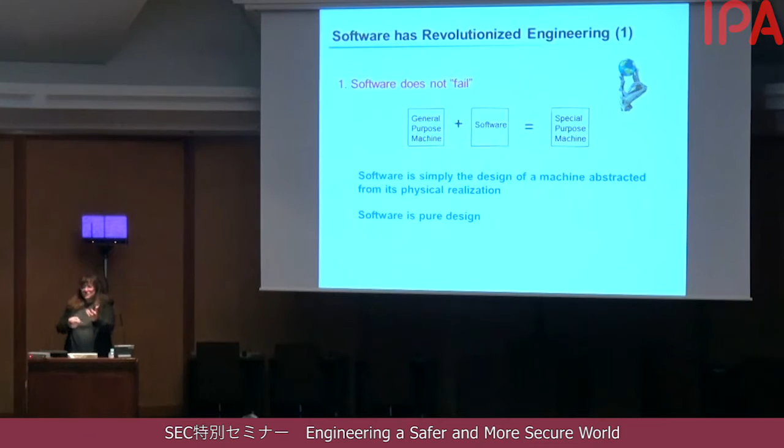Software is simply the design of a machine abstracted from its physical realization. Its essence is pure design. We've never had that before. But what does it mean for pure design, an abstraction, to fail? It's just design. It has no physical presence.

The second problem is that the role of software in accidents almost always involves flawed requirements, either incomplete or wrong assumptions about the operation of the controlled system or the required operation of the computer, or unhandled controlled system states and environment. For example, the autopilot expert provides some requirements to the software engineer, and the software engineer then designs the autopilot. The problem is we spend most of our effort here on making sure that the implementation is correct.

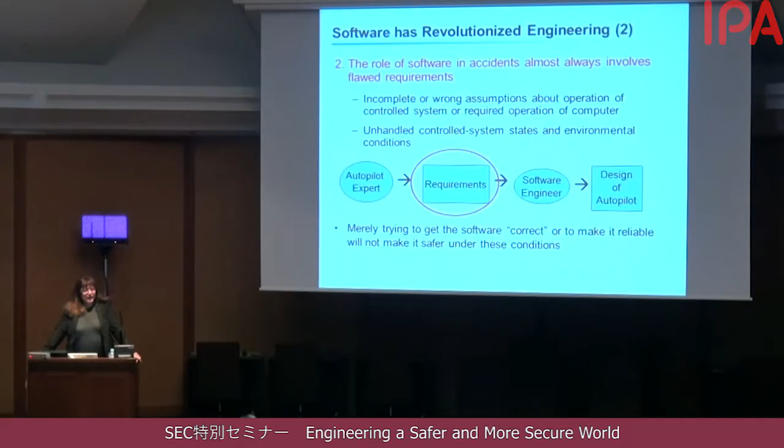But almost all accidents, I've been doing this for 35 years, and I've seen hundreds of them, every accident has involved flaws in the requirements, not in the implementation. So merely trying to get the software correct or to make it reliable is not going to make it safer if the requirements are wrong or are unsafe.

The third problem is that software allows almost unlimited system complexity. We can no longer plan, understand, anticipate, and guard against all undesired system behavior. We used to be able to test our systems, often exhaustively, and get the design errors out. And so all we had left were component failures, random failure, when we were using the systems. But this is no longer true. Our systems are so complex that we cannot test to find all the errors.

So we now have two types of accidents. The first type is the old traditional component failure accident, where there are single or multiple component failures, and we usually here assume some kind of randomness in the failures. But we now also have increasingly seen component interaction accidents that arise in the interactions among the components. None of the components may have failed. It's really a system design problem. They're related to interactive and dynamic complexity in the systems that we're building.

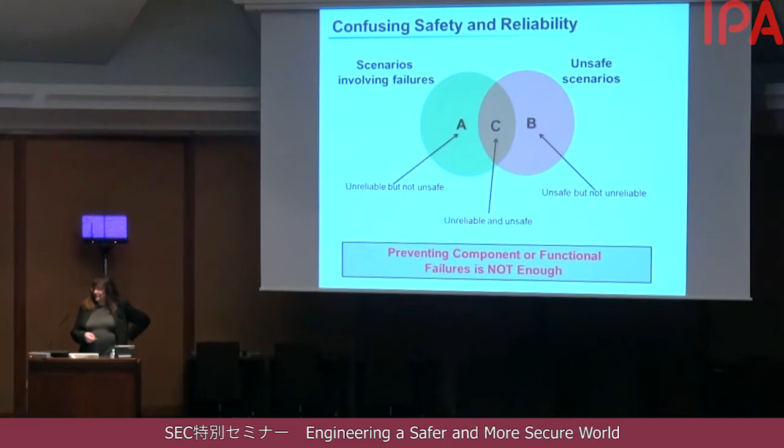So there's often a confusion between safety and reliability. So in the green circle are unreliable but not unsafe scenarios. Those are all the failures that can occur, failure scenarios. And this circle are the kinds of things that FMEA, failure modes and effects analysis, identifies. The pink circle is all the unsafe scenarios. Now, in the overlap, they're unreliable and unsafe. That's what fault tree analysis finds. But this part over here that are unsafe but not unreliable can't be found by our techniques, which are basically reliability techniques, techniques that are looking for failures.

The final really big change with software is that the role of humans in systems has changed. There's usually always been an assumption that operator error is the cause of most accidents and incidents. So as soon as the plane crashes, before they've even gone and found the plane, it's always announced that it was pilot error. Or most of our accidents in automobiles are assumed to be driver error or driver fault. So if that's true, then we have to do something about the operator. We could admonish them, fire them, retrain them, but we have to do something about them.

Or we can do something about operators in general. We can marginalize them by putting in more automation. So we put more automation between the driver or the operator and the actual physical system they're controlling. Or we rigidify their work by creating more rules and procedures that they probably won't be able to follow.

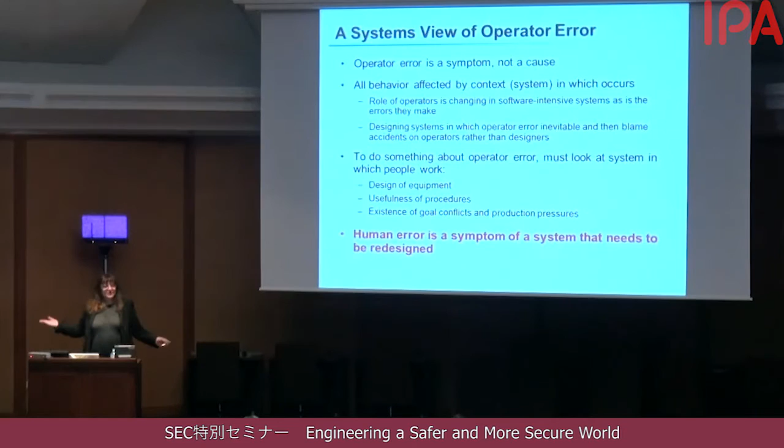We have to understand why people who are well trained, usually, trying to do the right thing, do the wrong thing. It's not just a random thing. It's usually something about the design of the system.

And in fact, today, we too often have human factors people concentrate from the interface screen outward. So they look at the screen design, the training of the operator, the procedures, and engineering concentrates only on the screen in. The problem is that there's not enough attention on the integrated system as a whole.

So we're designing automation that's confusing the operators. Mode confusion is very typical today. The operators are confused about what mode the aircraft or the automobile is in. Or situation awareness. They're confused about what's happening in the system. So we need to figure out how to do better integrated design. In engineering now, this is usually called human system integration.

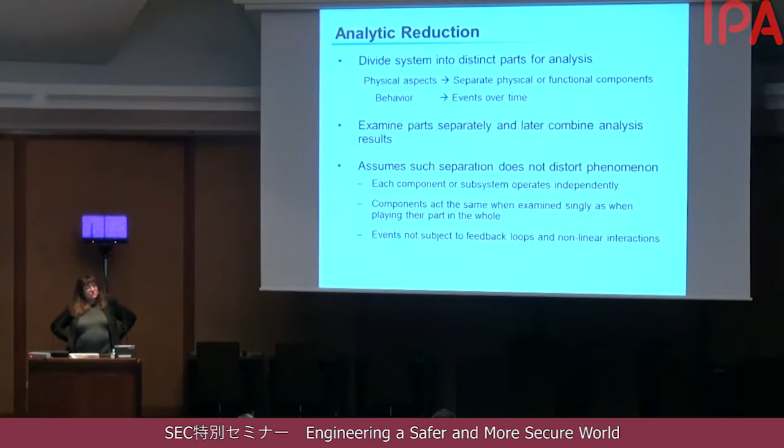It assumes that that separation doesn't distort the phenomenon itself, that each component or subsystem operates independently, that the components act the same when we examine them singly as when they are playing their part in the whole, and that the events aren't subject to feedback loops and nonlinear interactions. And for many systems, those are reasonable assumptions. And so we based our traditional approach to safety on this reductionist idea.

Divide the system into components, assume that accidents are caused by component failure, identify chains of directly related physical or logical, that is, functional, component failures that can lead to a loss. And that's what we're doing in fault trees, right? You're putting it together in a tree, but it's really a chain of events that you're identifying, failure events. And then we evaluate the reliability of the components separately, and later combine the analysis results into a system

reliability value. The problem is that this assumption of randomness in the failure events is required to derive the probabilities for a loss. But software and humans don't satisfy that assumption. Software and humans don't behave or fail randomly. In fact, they don't necessarily fail.

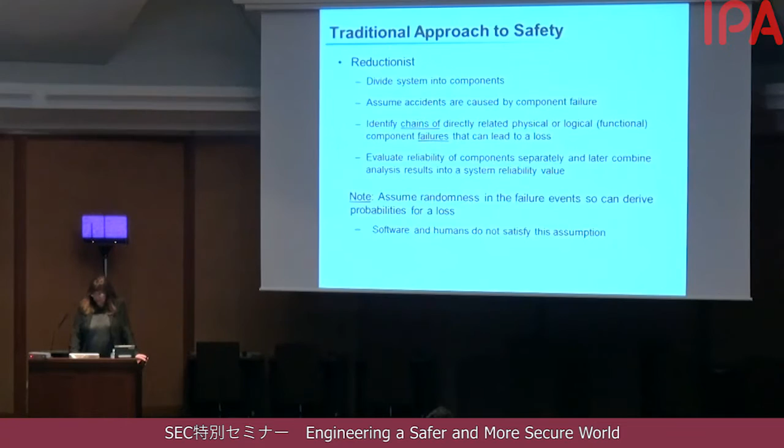But this idea of accidents as chains of failure events forms the basis for most safety engineering and reliability engineering analysis: fault tree analysis, probabilistic risk assessment, failure modes and effects analysis, event trees, fault hazard analysis, and so on. And it also forms the basis for our design techniques. We concentrate on dealing with component failure, because if component failure is the cause of all accidents, then we need to design to protect against component failure.

We use redundancy, barriers to prevent failure propagation, high component integrity, over-design, built-in safety margins, fail-safe design, and for humans, we identify operational procedures, checklists, provide training, and so on. The problem is, it doesn't work for a lot of things.

It doesn't handle these component interaction accidents where there were no failures. It doesn't handle system design errors. It doesn't handle systemic factors that affect all the components and the barriers. It doesn't handle software and system requirements errors. It doesn't handle human behavior in anything but a very superficial way. It doesn't handle indirect and nonlinear interactions and complexity. And it doesn't handle the migration of states toward higher risk over time.

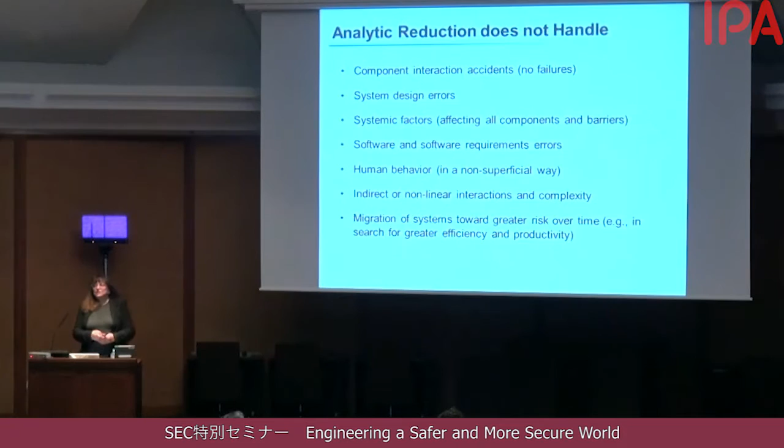In the search for greater efficiency and productivity, we start to change our behavior, and we usually move towards states of higher risk. You don't have an accident, so you think, oh, well, we can make it more efficient. And you keep doing that until you eventually have an accident.

So the alternative to this is systems theory. I want to spend a few minutes defining systems theory, because although it's very old, it's not taught very often in universities. It was developed in the 1940s and 1950s for systems that were too complex for complete analysis, that when you separated them into subsystems, it distorted the results.

And the most important properties in these systems are emergent, and I'll explain what that means, but basically they emerge from the interactions between the components. At the same time, these systems were too organized for statistics. There's too much underlying structure that distorts the statistics, and in fact, new technology and designs have no historical information. If you've written the software and it's the first time it's being used, which is usually the case, how do you know what the probability of failure is, if we even can define software failure? We have no information until 10 years from now, and then it's too late.

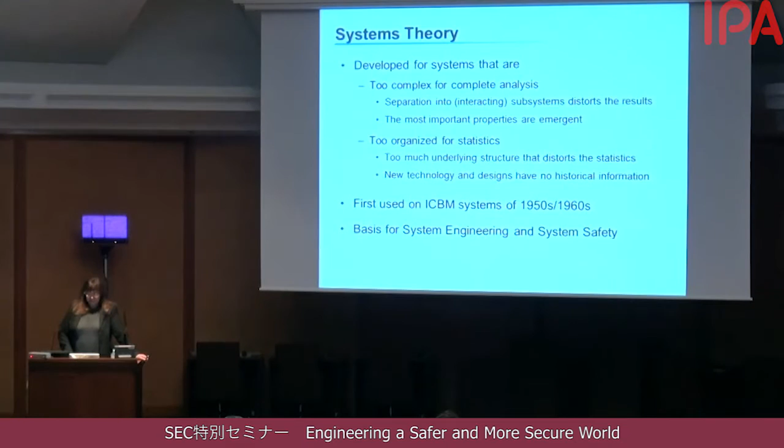In fact, systems theory was first used in the 1950s and 1960s for the intercontinental ballistic missile systems that the United States was building. We started having accidents, and these systems were so complex, they started having these component interaction accidents. They started having accidents where no individual components failed, but they were caused by system design errors. And in fact, systems theory became the basis for system engineering. System engineering was also invented for these same ICBM systems, and system safety at the same time.

So what is systems theory? Well, it focuses on systems taken as a whole, not on the parts taken separately. It looks at the things that I mentioned before, emergent properties. These are properties that can only be treated adequately in their entirety, taking account of all social and technical aspects. You've probably heard the phrase, the whole is greater than the sum of the parts. That's the basic principle behind systems theory and behind system engineering. These emergent properties arise from the relationships among the parts of the system, how they interact and fit together.

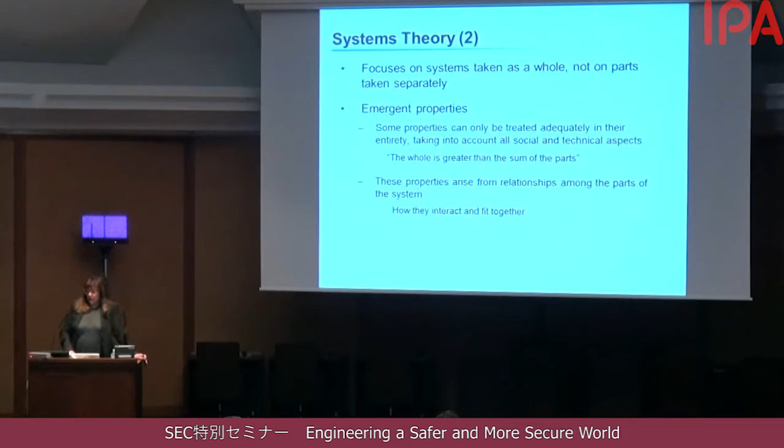Safety and security are emergent properties. If I hold up a valve and I tell you, I'm going to use this valve in my car or in my nuclear power plant, will the car or the nuclear power plant be safe? You can't answer that question because safety is not in an individual component. It's in how all the components interact together.

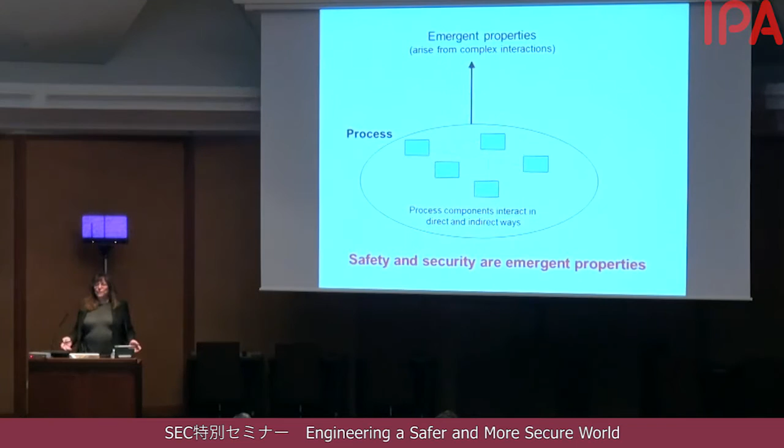So how do we deal with emergent properties? Well, we need some way to control the interactions. We actually need to control two things: the individual component behavior and the component interactions. In essence, we're enforcing constraints, or safety constraints, on the interactions or the behavior of this system. As an example, if every plane in the air decided it would optimize its own path from takeoff to landing, we would have chaos, and we'd have accidents, because we might have all the planes wanting to land at Narita at 5 p.m.

And so we have to somehow, and then nobody gets optimized. Each of them trying to optimize their own path means that the whole system isn't optimized. Nobody gets to where they want. So we put in an air traffic control system. The air traffic control system controls where the planes go. It optimizes the overall safety and the overall throughput, but not necessarily each individual plane's path. But system-wide, that's what we mean by an emergent property. It has to be controlled in some way.

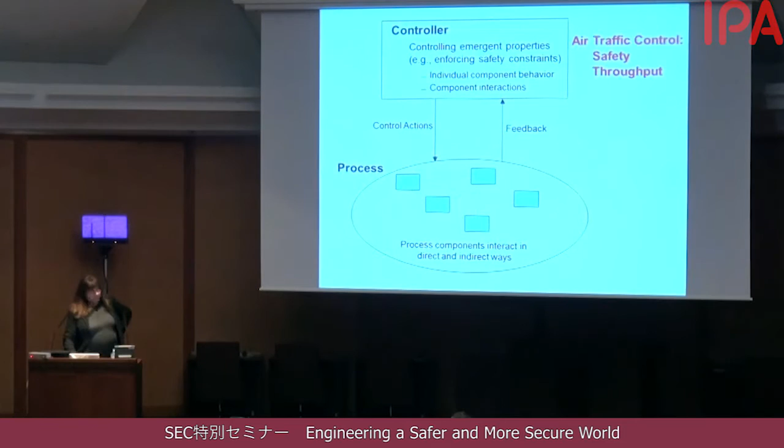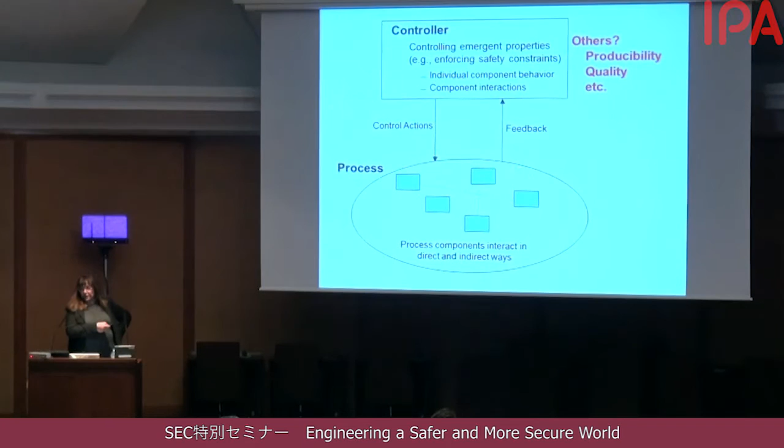Now, there are lots of other emergent properties: producibility, quality. And when I get to this at the end of the talk, the same process will work for these other qualities, and we're starting to show that. People are starting to show that. So this controller has to issue control actions to control the behavior of the components, and it gets feedback from the system to find out what's happening in it.

So I mentioned safety constraints. These are examples of safety constraints. Power must never be on when the access door is open. Two aircraft or two automobiles must not violate minimum separation. Aircraft must maintain sufficient lift to remain airborne. The integrity of the hull, the outside, must be maintained on a submarine. Toxic chemicals and radiation must not be released from a plant. Workers must not be exposed to workplace hazards. Access to information must not be allowed to unauthorized people. These are all the high-level functional requirements to address during design. They're what your system must enforce in order to be safe or to be secure.

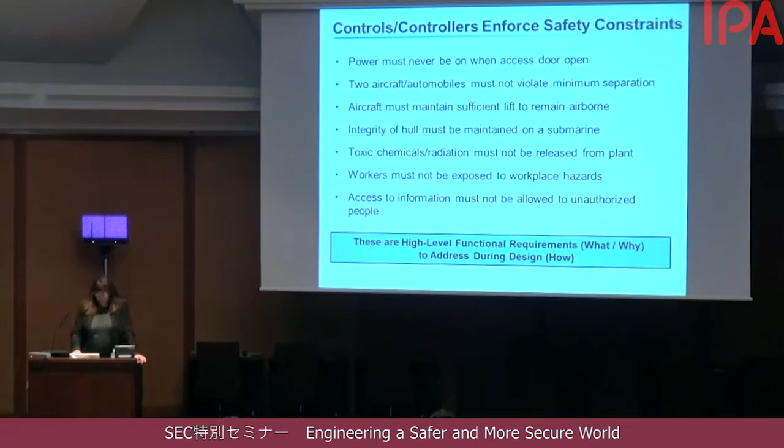Now, this is a very broad view of control. Component failures, which we still have to deal with, and unsafe interactions may be controlled through design: redundancy, interlocks, fail-safe design. We're not omitting anything here. We're adding to what we already do. Or through process: engineering processes, manufacturing processes and procedures, maintenance processes, operations; or through social controls: government or regulatory controls, culture of an organization, the safety culture. Insurance companies are very effective controls. Law and the courts, individual self-interest. You design an incentive structure that encourages people to do the right thing.

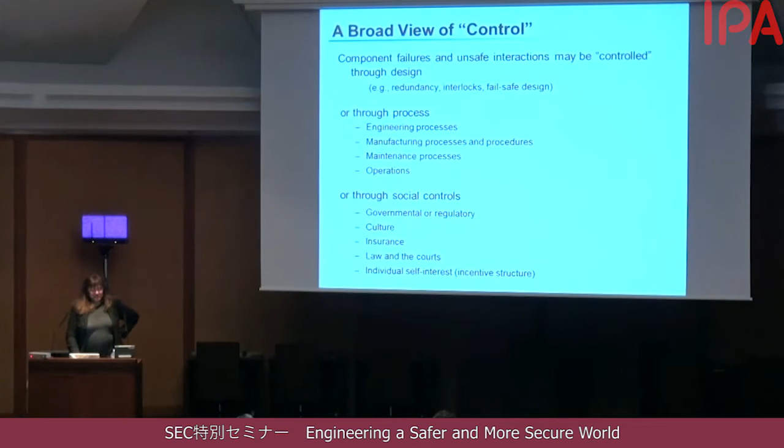There may be multiple controllers, multiple levels of control. Each controller enforces specific constraints, which together enforce the system-level constraints or emergent properties. And so, just an example, we have communication also between these things. So here's a very small example, sorry. But right down here is actually the physical process. Above that, we may have an automated controller. Above that, a human controller. And this in the red box is the operating process. But above this, in the operations control structure, there's operations management, company management, government regulatory agencies, industry associations, insurance companies, the courts. Above that may be some legislative branch of government.

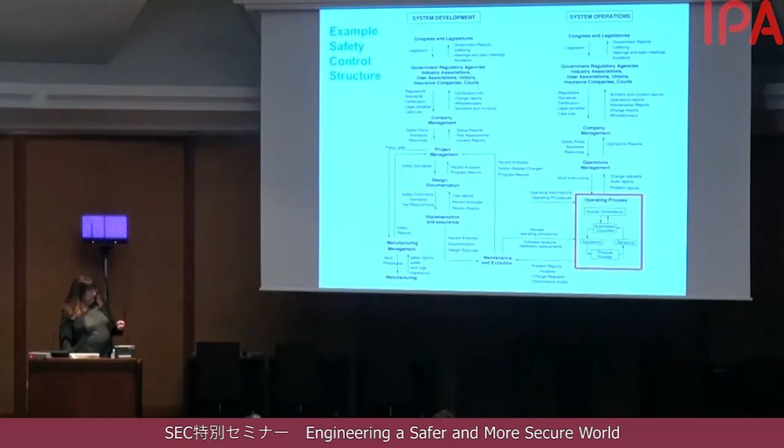Between each of these, there's a feedback control loop. The company management, for example, provides safety policies, standards, resources, and gets back reports or feedback about how things are going. Over here, the same thing with system development. We have a control structure. We have information going between the two. Let me show you a little example of this operating process here. We can just look at that.

This is an adaptive cruise control system, and the brake control module for one in an automobile. Simplified diagram. We have a driver that uses some instruments to send messages and control action to the adaptive cruise control module. The adaptive cruise control module sends a braking signal to the brake control module, gets back feedback in terms of braking status, vehicle speed. The brake control module sends a signal to the brake, which uses friction to stop the vehicle, and gets feedback about the wheel speed. Most of you are probably engineers, and you've seen something like that. It's just a standard feedback control loop.

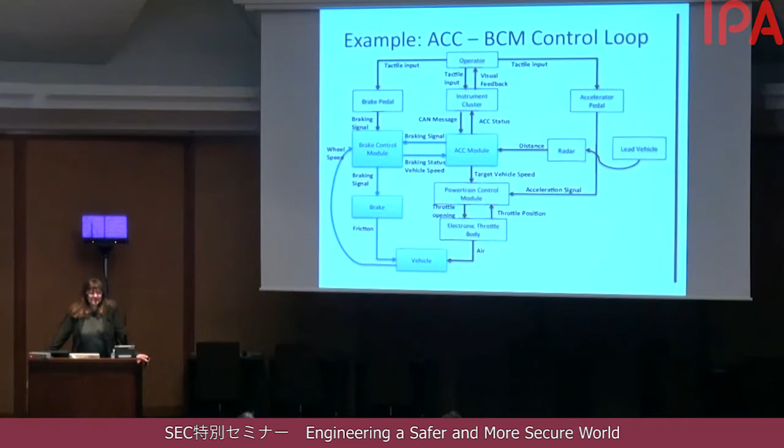Now, just an example of the control structure, and to show you we can do control structures at levels of refinement. At the very top level, we have a simple control structure. This is the International Space Station. Here's the HTV. This is a backup means of communication. We have NASA ground station. We have JAXA ground station. And to avoid certain kinds of problems, JAXA can only talk to NASA, which talks to the astronauts. Otherwise, we sort of had chaos with different instructions being given to the astronauts.

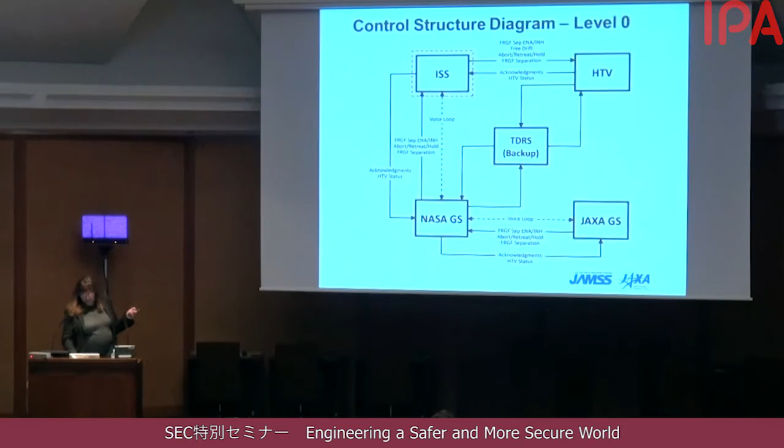Now we can look and we can refine this. So let's look inside the ISS. We have the crew, which controls, this is the control panel for the system. This is the monitor or feedback channel. This is the arm, the robotic arm that the crew manipulates. We have some software here, and we have things going down to NASA ground station and so on.

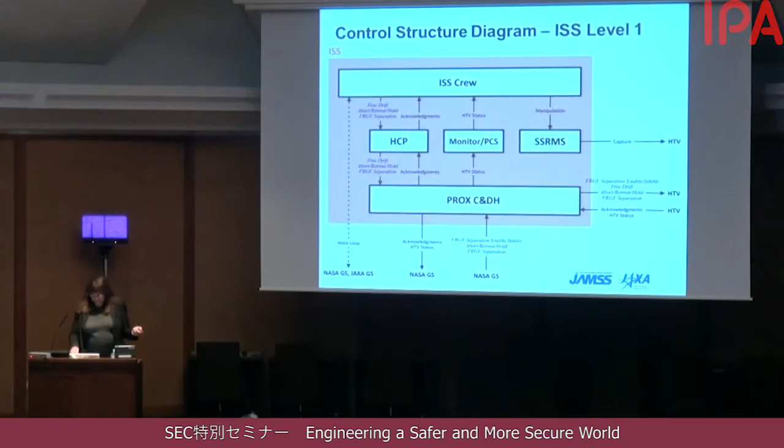Okay, now each of those components has some safety constraints. Those are just the assigned responsibilities, authority, and accountability for what they're supposed to be doing for safety. And they also have some controls that they can use to enforce the safety constraints. Each component's behavior is influenced by the context in which it's operating and by knowledge about the current state of the process. Now, there's one other thing that we need here, and that's the idea of a process model.

Every controller has some kind of control algorithm, but it also has a model of the process it's controlling. It can't make decisions about control actions without knowing what state the controlled process is in. We can sometimes do pure feedback control, feed-forward control, for those of you who are engineers, but normally not. This process model is often involved in accidents when a human controller or software controller is involved. So when the process model becomes unsynchronized with, inconsistent with the real state of the process, bad decisions may be made here.

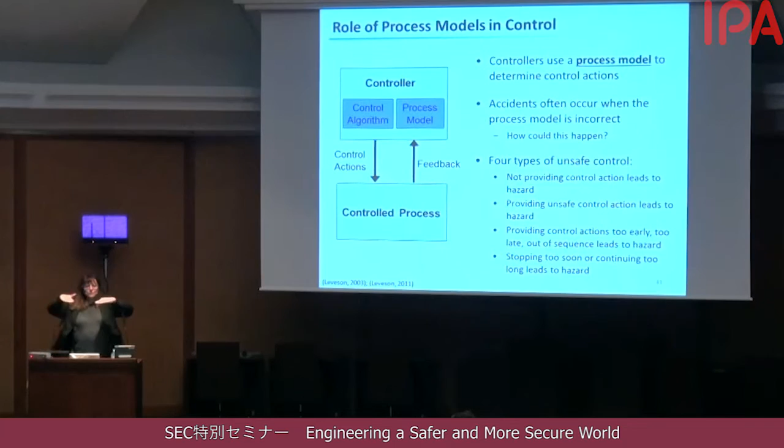Okay, so what is STAMP? STAMP stands for System Theoretic Accident Model and Processes. Instead of defining safety as a failure problem, it defines safety as a control problem. It applies to very complex systems. We have used this, or people have used this on some of the most complex systems on Earth today, successfully. We would never have been able to use fault trees, failure modes and effects analysis, or anything else on these systems. It includes software, humans, new technology. It's based on systems theory and systems engineering. And what it basically does is not replace the traditional model of accident causality, but expands it. It's not just the chain of directly related failure events, but that losses are more complex processes.

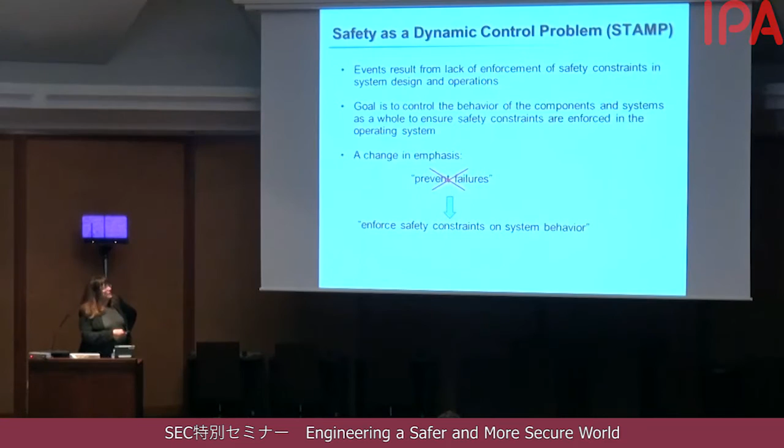It changes our analysis goals. In hazard analysis, instead of looking for chains of failure events that lead to the accident and trying to identify their probabilities, we look at the ways the safety constraints might not be enforced so that those things can be eliminated or mitigated in the design or in operations. When we're analyzing an accident, instead of looking for what failures led to the loss and who was responsible, we say, why wasn't the safety control structure, the safety management system, adequate to prevent the loss?

So STAMP is not a tool, it's not a method, it's a model, a causality model. But using that, we can build tools on top of it and then put those tools together to get better processes. Some of the tools we've created are CAST, which is used for accident or event analysis, hazard analysis, which is STPA, early concept analysis. We can look at a system in the very, very early stages before we have any design. We're just building a concept document and do safety analysis on it. Organizational cultural risk analysis. We can identify leading indicators of risk increasing, and we can do security analysis with a very similar process to STPA.

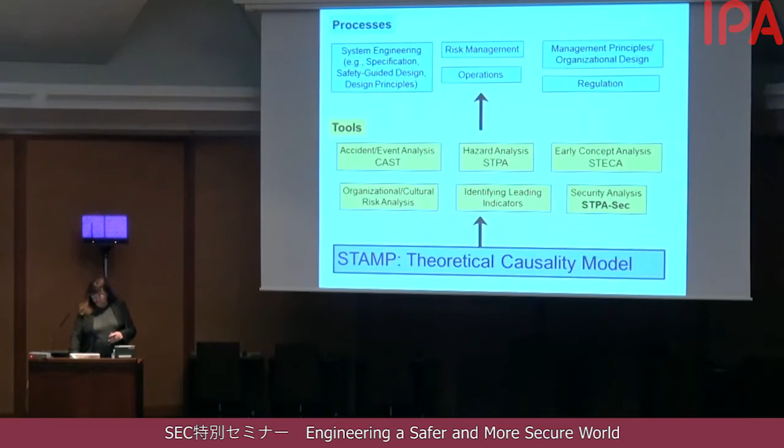Our real problem is that 70 to 80% of safety decisions are made in the concept formation stage, early when we're designing a system. But the techniques, so here's concept, requirements, design, this is effectiveness and cost. Most of our techniques that we have now all require that there be a design.

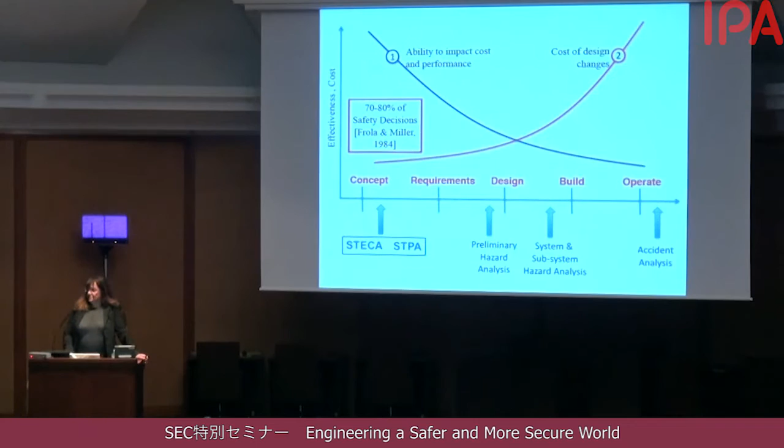This is the cost of design changes. Actually it's probably too high, it's almost nothing at the beginning, but as we get farther in the design process, it costs an enormous amount to do rework and to make changes. At the same time, our ability to impact cost and performance goes down the farther we get into the whole development process. So what we need is something up here. And STPA, which I'll talk about, and STECA, are two new tools that work very early to help us design safety into the system before we've made irreversible design decisions that turn out to be wrong or not very wise.

So let me start with STPA. It's a top-down system engineering analysis technique. It identifies the safety or whatever emergent property you're looking at, constraints, that is, it identifies the system and component requirements. It identifies the scenarios leading to the violation of the constraints or requirements, and then we're going to use that information to design or redesign the system to be safer. It can be used on technical design and organizational design, and it supports a safety-driven design process where the analysis influences and shapes the early design decisions, and the analysis is iterated and refined as the design evolves. So as we make design decisions, we'll iterate and refine the analysis in parallel.

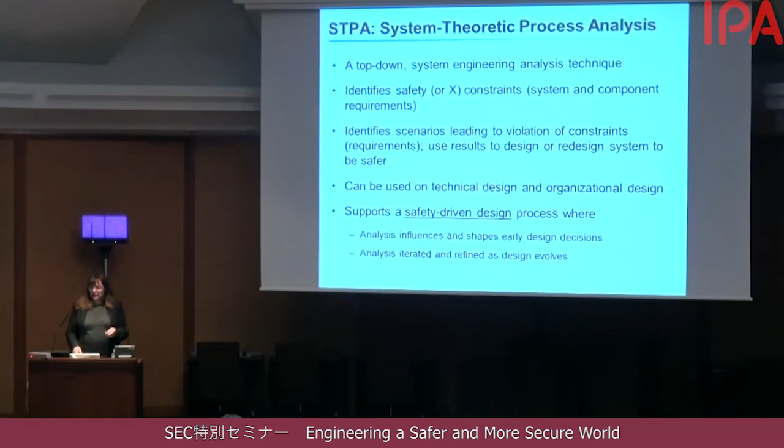So here's another example that I'm going to use. I'm going to show you STPA on this. This is a real accident. It occurred in England. It was a batch chemical reactor. The computer was responsible for opening and closing a valve that allowed catalyst to come in and start the reaction. The computer also controlled a water valve that allowed cooling water to go into the reflux condenser and cool off the reaction.

Now it had one other requirement. The software engineers were told there were some sensors in the plant. And the software engineers were told, if you get any input here, it means something has gone wrong in the plant. What you should do is stop everything, sound an alarm, and tell the operators. So one day, there was a low oil level in a gearbox.

And the computer got word of that, and it stopped everything, and it sounded an alarm. It did exactly what it was supposed to do. So nothing failed here, but it turned out that this information came in just after the computer had opened the catalyst valve, but before it had opened the cooling water valve.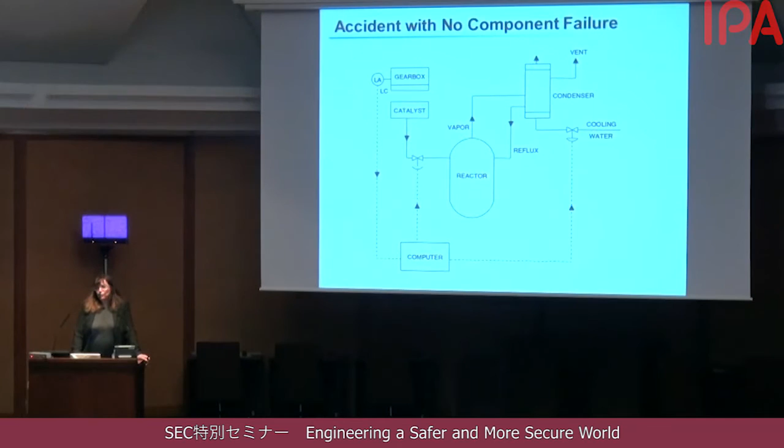In the requirements, they never told the computer programmers to open the cooling water valve before they opened the catalyst valve. If they'd told them that, they probably would have done it right. They just didn't know. That's the kind of thing we're having here with this related to software. So how are we going to analyze that with STPA? I don't have time to teach you STPA, but I will show you an example of how we do it.

The first thing is you have to build a functional control structure. Here's the physical model that you saw. It's the physical interactions between the components. But it's not the logical interactions. So we build this functional model, which has three components: the operator, the computer, and the valves. And we need to know who controls what, what commands are sent, and what feedback is provided.

Well, the operator controls the computer, and the computer controls the valves. The commands sent by the operator are start and stop. It gets information back about the plant status, the alarms. The computer can open or close the water valve, and it can open or close the catalyst valve. We may not know what feedback we need, but in the analysis, we find out what feedback is needed for safety.

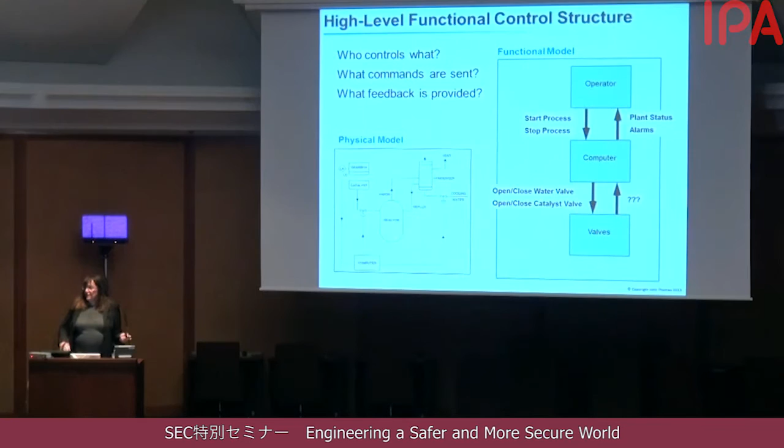The next step is we have to say, how could unsafe control be provided here? Well, I said earlier there are 4 ways unsafe control can happen. Providing the control action leads to a hazard. Not providing the control action leads to a hazard. Timing or sequencing leads to a hazard. Duration. So what we're going to do first is identify the conditions under which the control action can lead to a hazard. Then we're going to use that information to try and discover why that could happen and design it out of the system early.

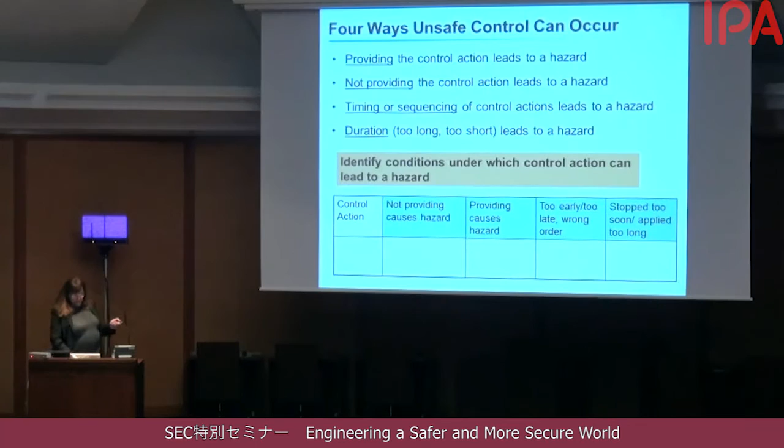So we use a table. Actually, Japanese engineers came up with the idea of using the table. So this is a Japanese invention. Here's the control action and then the 4 types of unsafe control. So let's start this. We're going to look at the computer. It can open the water valve, close the water valve, open the catalyst valve, close the catalyst valve. What we want to do is provide them. They have to do this. We provided those instructions for good reason, but we need to determine when they can be unsafe, under what conditions.

So what about opening the water valve? Can not providing it cause a hazard? Well, yes, if it's not opened when the catalyst is open. Can this be unsafe, providing the open water valve command? Are there any conditions under which it's unsafe? Can you think of anything? Time or duration is one of those conditions which could lead to a hazard.

Yeah, they can, but not this provided. What it means is we could waste some water. But opening the valve doesn't do anything but waste water. It doesn't cause overheating of the reactor. But if we open the water valve more than X seconds after the catalyst valve, or we stop opening the water valve before it's fully opened, then we could get overheating of the reactor, which is the hazard.

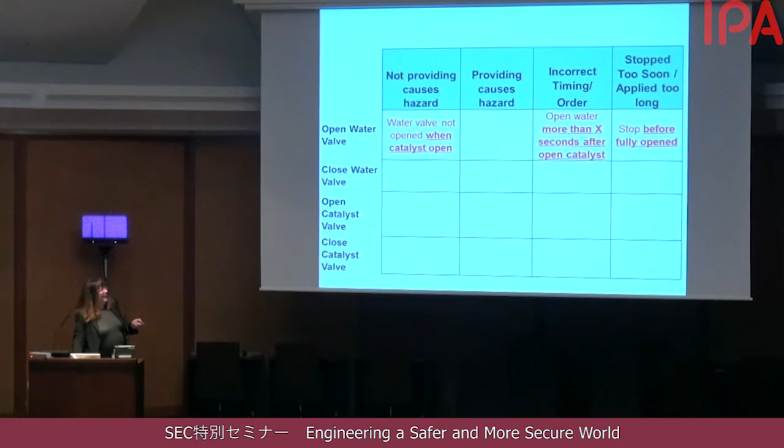Now we can fill in the rest of these. Do I have enough time? I don't think I have enough time. I'll make you do it, but I'll show you it. Closing it while the catalyst is open, closing the water valve. You know, I forgot that when I first started thinking about this. I thought, well, I just have to open the water valve before the catalyst valve. But I forgot that if I close it before I close the catalyst valve, I could have a problem. So you just fill this in. There are lots of them. We don't have to go through it. You'll have it in your notes. You can look at it if you want.

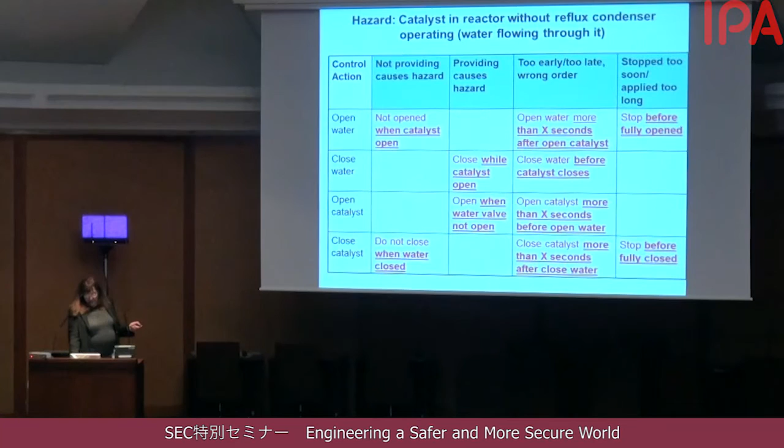And we can take this information and write high-level requirements for this reactor, software requirements. The water valve must always be fully open before the catalyst valve is open. The water valve must never be opened or completely opening more than X seconds after the catalyst valve opens. The catalyst valve must always be fully closed before the water valve is closed. So we just identified the requirements for the software.

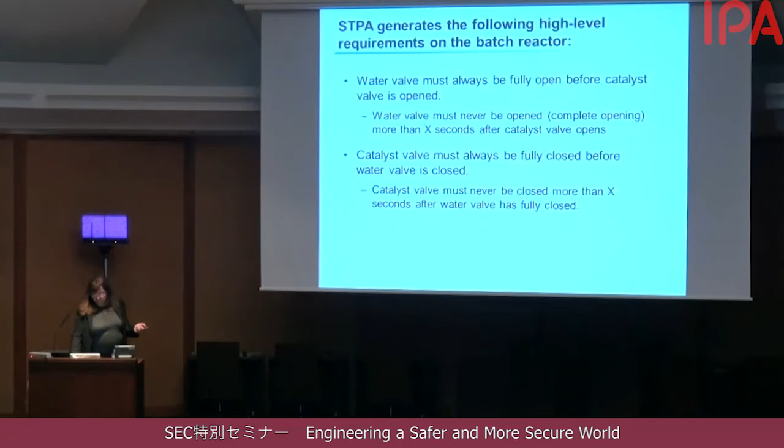Remember, most accidents in software, virtually all of them, are caused by bad requirements, flawed requirements. We can use this to identify those requirements. There's no other technique that can do that. But there's more. Oh, first of all, we can automate much of this.

John Thomas figured out how the engineer can just provide the hazards and the computer automatically fills in that whole table for you and then generates formal model-based requirements directly from the hazards. Because there's an underlying discrete mathematical model, we can do automated various kinds of checks, detect inconsistency, incompleteness, and so on.

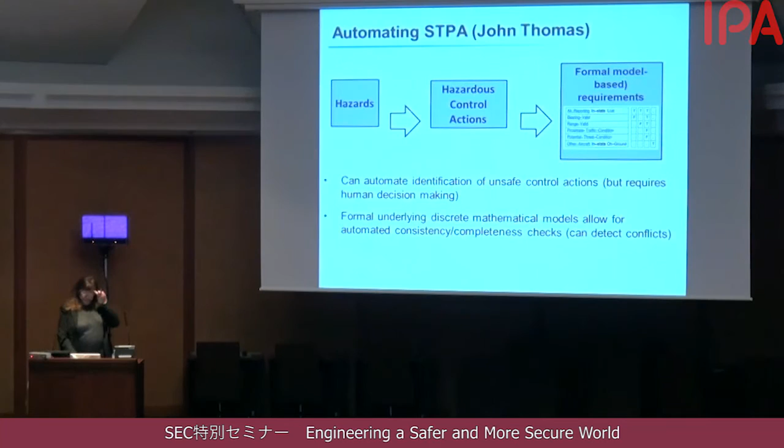The next step, people stop here, but you're stopping too soon. We need to go on. We need to identify why would those things happen? Why would the computer open the catalyst valve when the water valve wasn't open, for example? Why would it do that?

So we need to identify the causal scenarios of the unsafe control actions, including why the process model might be incorrect, and also identify safe control actions being given but not executed. So the computer could do the right thing. It could issue an open water valve, but the water valve may not open. Those are the standard kinds of failure scenarios identified by FMEA and by fault trees. We still need to do those things, but they won't identify this first type.

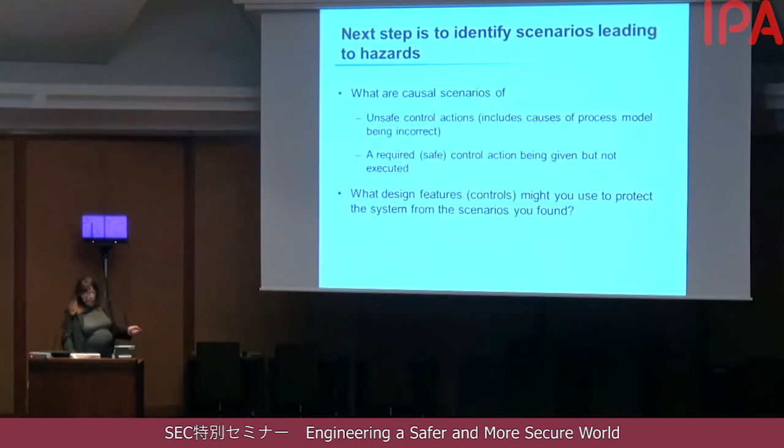And then the next step is to look at what design features or controls you might use to protect the system from the scenarios that you found. So here's an example. Let's say our unsafe control action is that the software issues an open catalyst command when the water valve is closed. Why would it do that? Well, no one may have told the software engineers about it, which is what actually happened. Or probably if you used STPA, they got that information. But the software may think the water valve is open, so it issues an open catalyst. Right? It thinks that the water valve's open, so it opens the catalyst valve.

That's really because the process model is incorrect. Why might the software process model think that the water valve is open when it is not? Well, there are lots of scenarios. Here are some examples. If the software issued an open water valve command, but the valve didn't open. It was jammed, it was failed, etc. But the software assumes because it issued the command, it was executed. Well, hopefully as engineers you immediately see that the problem here was missing feedback, right? If we got some feedback, it would know it hadn't opened.

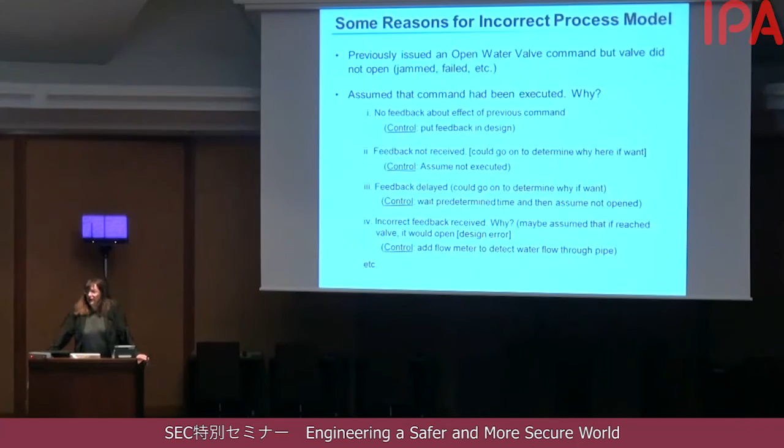So what can we do? Well, we can add a flow meter to detect that water is really flowing through the pipe. There are other solutions. All I'm showing you here is if you understand why things could go wrong, really bad things could go wrong, then we can figure out how to design to protect against them.

So this generates new requirements. We didn't finish with just those first requirements from the table. We have to go on to get more detailed requirements. So, requirements to include feedback. The software shall check for feedback after issuing an open-close command. If not received in a specified time period, then assume that the valve is not open or closed and do something. What you do will depend on what the system's doing.

There must be feedback to the controller to determine that water is actually flowing through the pipe before issuing an open catalyst command. Perhaps you could write a more detailed requirement and say use a flow monitor or use something. But what we're doing is, as we're designing this thing, we're figuring out what could go wrong that would be hazardous, and then designing in a fix for it.

There's one other thing. I said we need to consider that the command was provided but not executed. That's the traditional kind of thing that you look at in a traditional failure analysis. But we may be able to solve the problem without going all the way through how it fails. We just may be able to figure out some other design solution and save ourselves a tremendous amount of time.

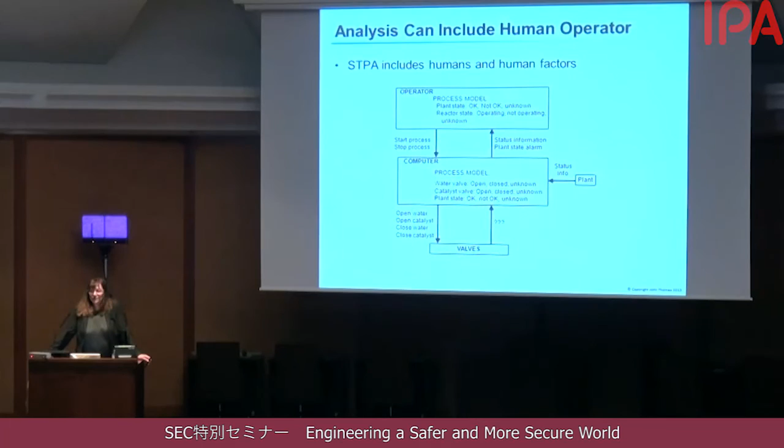I just want to make a comment. Our analysis can include the human operator. The analysis works the same way for humans as it does for software. And we have lots of examples. I don't have time to show one. But you can now treat the operator as part of the system without separating them out and not considering them. That's STPA.

I'm going to go through the other tools much quicker. CAST is an accident analysis technique. It helps in understanding the entire accident process and identifying why it occurred. We get away from blame and shift the focus to why and how to prevent it in the future. Our goal is to determine why the people behaved the way they did.

If you stop in your accident analysis and you say, pilot pulled up when he shouldn't have, you haven't learned anything. There's some reason why the pilot pulled up when the plane was in a stall, for example. These are trained pilots. They didn't just have some random mind warp. They usually did it because they thought that was what they needed to do. So we need to look at why they thought it was the right thing to do. And then we can help provide a better design and better information to the pilots or the drivers of an automobile.

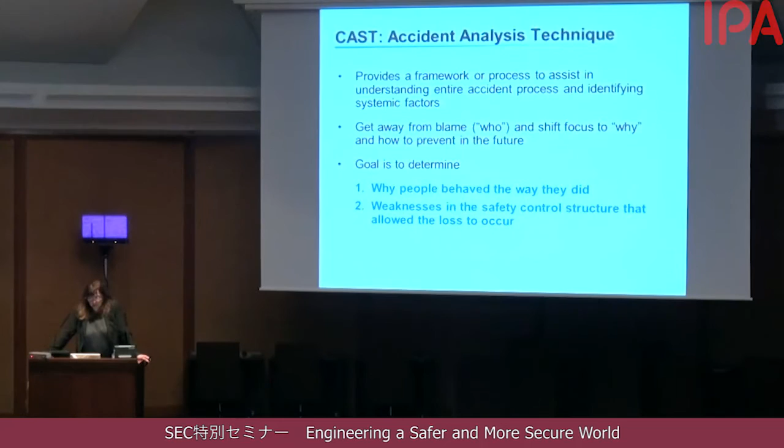STECA is a brand new technique. A PhD dissertation was finished in January. It's already being used. Most of my students' PhD dissertations are used before they can ever get them published or finish them. This one's wonderful. It works really early in system design. When you only have an English language concept of operations, you don't know anything, we can take STPA, create a model of the early system, and use model-based analysis to identify unspecified assumptions, missing, inconsistent, incomplete information in your concept of operations document, vulnerabilities, risks, trade-offs, system, software, human requirements, and architectural and design analysis to eliminate and control the hazards.

So for example, this is going to be very quick, but this is something called TBO, trajectory-based operations. It's part of NextGen, which is the upgrade to the air traffic control system in the United States. TBO is extremely complicated. We're basically doing everything by computers, getting rid of radars, using satellite navigation. People will be able to take direct routes instead of going around a long way. So far, all they have is some English language concept of operations. That's all they've gotten so far, because they don't really know how to do this yet. So taking that English,

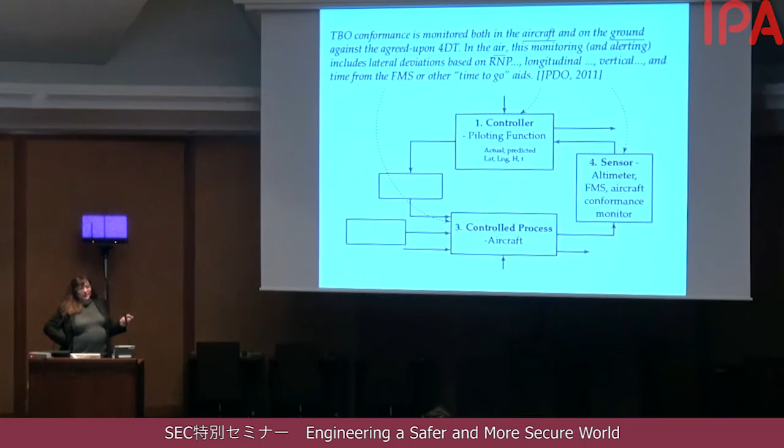Cody Fleming, Dr. Fleming, figured out a procedure for creating the control loop that's implied by that language. And when you do all this, you get a control loop and you immediately see things missing. Like, here's a control loop that isn't closed, or you see missing feedback, or you ask other questions, like we have 2 conformance monitors, one in the air, one on the ground. How are those going to be kept consistent?

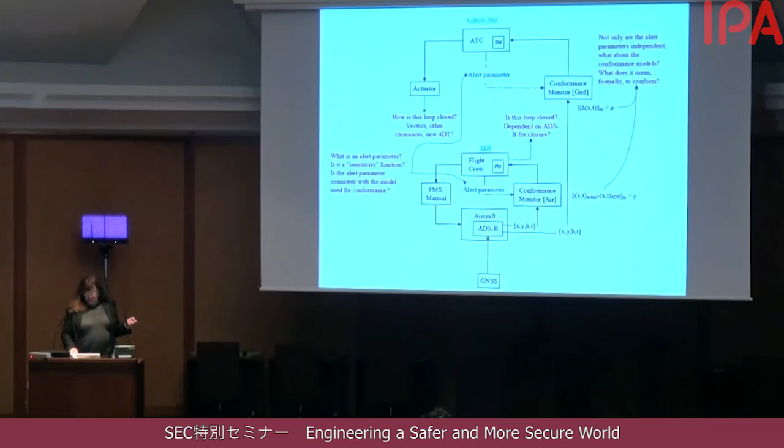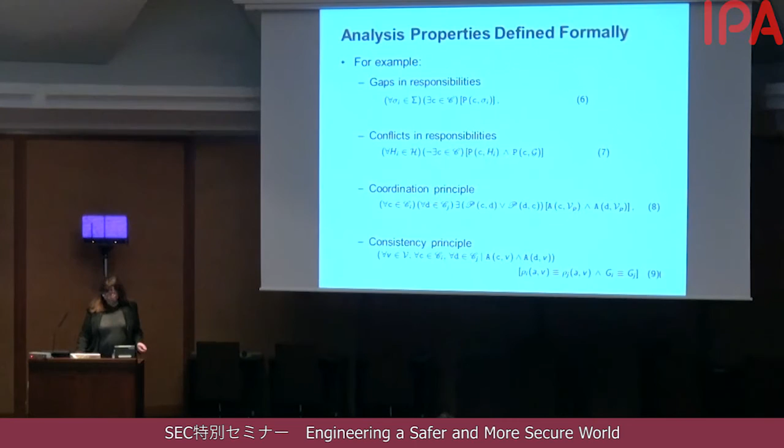And so on. So we use this to analyze our concept of operations. And in fact, the properties have been defined formally. So we can identify gaps in responsibilities, conflicts in responsibilities, coordination problems, inconsistency problems, and you don't have to worry about the math. The point is that we've defined it formally, and therefore potentially much of this can be automated. The analysis. All right, that's STPA.

What about cybersecurity? Well, there's an Air Force colonel who was my student, Bill Young, who decided STPA worked for security. And I said, I don't believe it. I said, show me. So he did. Currently, cybersecurity doesn't work today. I mean, I'm sure I got mail this morning that I was one of the 5 million people that the Chinese stole all my security information about. And the Chinese know all about my background now. It's not working. We're hearing about more break-ins every day, and they're getting worse, not better.

Something's not working here. And what he argues is that now we're focusing on tactics. We often frame cybersecurity as a battle between adversaries and defenders with tactics. And it requires correctly identifying the attacker's motives, capabilities, targets. That doesn't work. Now, he's in the Air Force, and the people in the military know you can't just use tactics. You need strategy to control the tactics. So we can reframe the cybersecurity problem in terms of strategy.

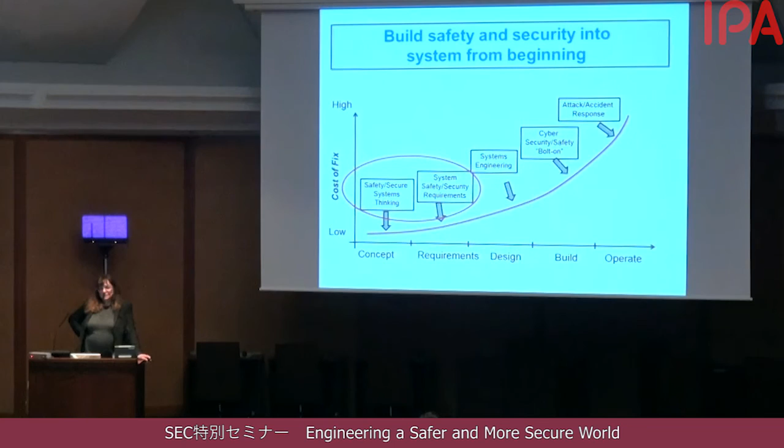This STAMP and all these tools apply to other applications. And in essence, it applies to any emergent property. In fact, right now, I've just started working on something I never thought I would work on, which is occupational or workplace safety with Boeing. Boeing is concerned they're speeding up their production lines and are concerned about injuries in the production lines. We're using this to actually reduce injuries to workers in manufacturing.

We can use it for risk management, identifying leading indicators. Some examples of things people have done: risk in a software quality organization. That's at Lawrence Livermore National Labs. CO2, carbon dioxide capture, transport, and storage. Some people in France did that. U.S. Coast Guard financial management. People are using this in the financial world. Never thought that would happen. But they tell me it works. Aerospace, producibility risk management, analyzing sources of quality loss and engine technology changes, identifying feature interactions in automobiles.

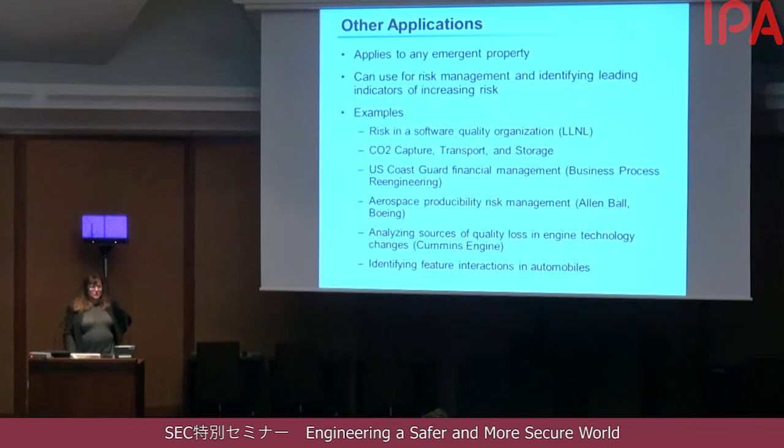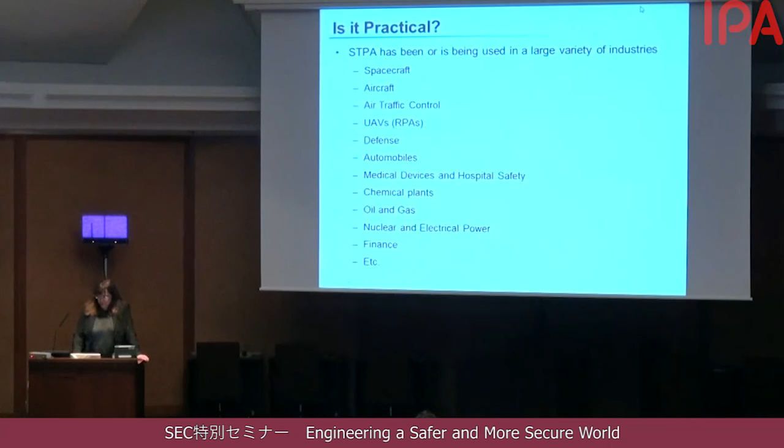Does it work? This is the next question. Is it practical? It's being used on nearly everything, every kind of industry. This is just some of them, but it's been used everywhere now. Whatever you're in, it's probably been tried on. The question then is, well, they've used it, but did it work? Well, many of these systems are very complex. For example, the new U.S. missile defense system, in which it was used before deployment, and they found so many paths to inadvertent launch that nobody had found earlier, that they had to delay the system for 6 months and spent hundreds of millions of dollars fixing just the things that two people I know found in 4 months on this thing.

In all the cases where a comparison has been made, and most people are comparing it with their old techniques, STPA found the same hazard causes as the old methods, plus it found more causes than the traditional methods, usually those related to human error and related to software. In some evaluations, it found accidents that had occurred that the other methods missed. The analysts weren't told this was in a nuclear power plant, a medical device has happened too. They were given a design, just told to analyze it, and it turned out there had been an accident related to that system, but the analysts didn't know about it, and only STPA found them.

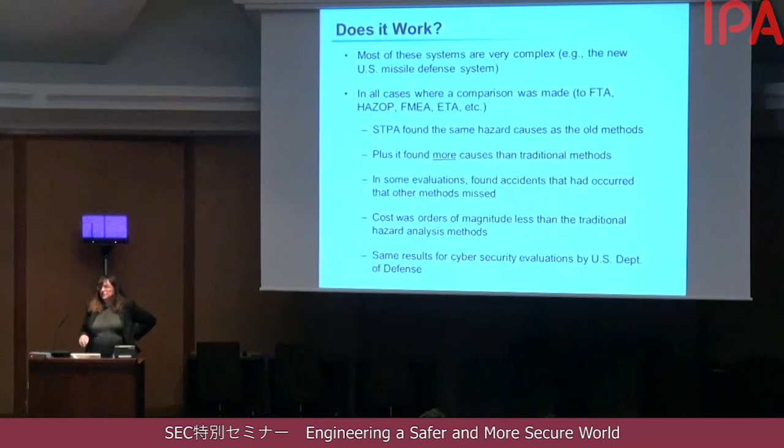So it's working. The same thing as cybersecurity. The US Department of Defense is evaluating STPA for security on real Air Force and military missions. And it was so much better, but with real experts, real cybersecurity experts. And STPA was so much better, they have now issued policy for everyone in the DoD to use it for certain kinds of security problems. So, summary. It's a more comprehensive and powerful approach to safety and security or any emergent property. It includes social, organizational, operator, software-related factors. It's a top-down system engineering approach. It starts at the very beginning. You can design the safety and security and the other properties in from the beginning. And it handles much more complex systems than traditional safety analysis approaches, and it costs less.